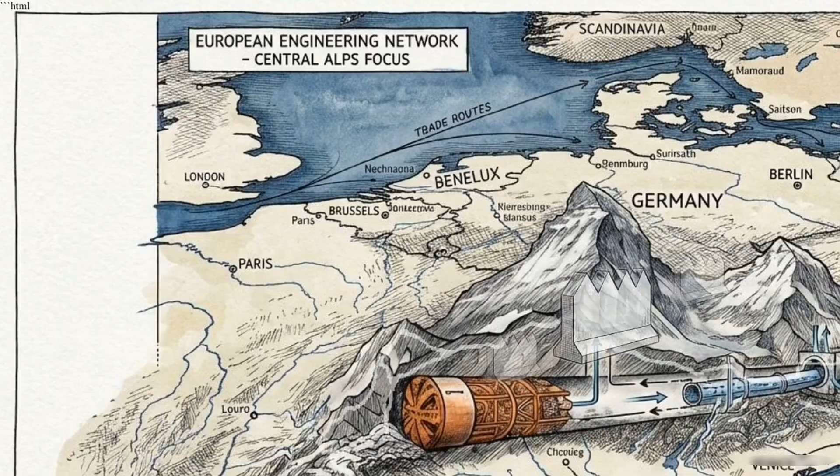The Swiss Alps stand as a massive, jagged wall of rock and ice. For centuries, this physical barrier divided the factories of northern Europe from the seaports of the south, forcing all trade over steep, dangerous mountain passes.

By the 1990s, these narrow routes reached their absolute physical limits. Heavy truck traffic created massive logistical bottlenecks, while the exhaust fumes began to suffocate the pristine mountain valleys. Finding a faster route was a matter of economic survival. If freight couldn't move through the mountains efficiently, the entire European supply chain faced a total collapse.

The engineers proposed a radical bypass, driving a hole straight through the mountain's base. At 57 kilometers long and 2.5 kilometers deep, it would become the deepest and longest transport tunnel in human history. To finish the project on time, two separate engineering teams had to drill blindly toward each other from opposite sides of the range. Because of the vast distance, they mathematically accounted for the physical curvature of the Earth.

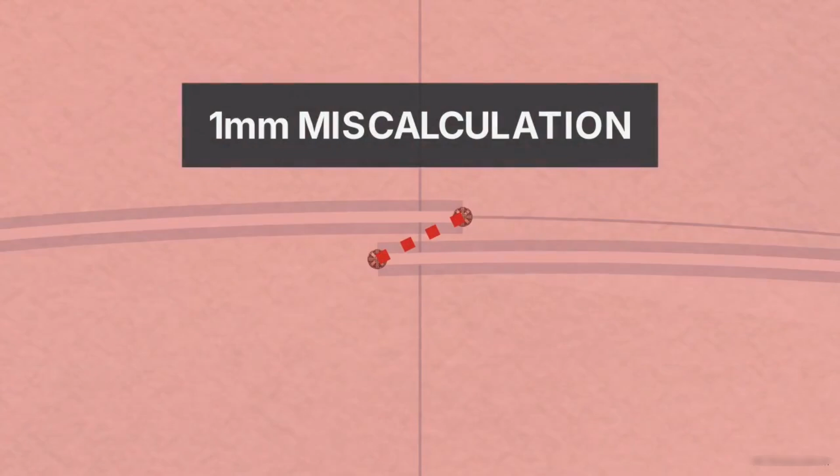The stakes were absolute. A single millimeter miscalculation would cause the tunnels to miss each other, wasting 17 years and billions of dollars. Achieving that level of precision meant winning a high-stakes war against the unconquered geological forces hidden deep inside the Earth's crust.

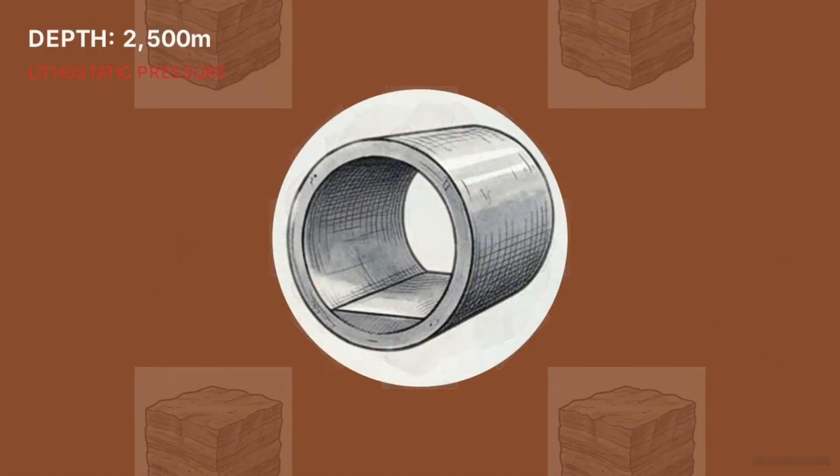This is Sissi, a 450-meter-long tunnel boring machine designed to chew through 30 million tons of solid alpine rock. Underneath 2.5 kilometers of mountain, the sheer weight of the rock crushed heavy steel supports like aluminum cans. Crews immediately sprayed rapid-set concrete and installed precast slabs and heavy steel rings to hold back the earth. Advancing every single meter required an immediate, simultaneous effort to support the weight of the entire mountain to avoid being buried alive.

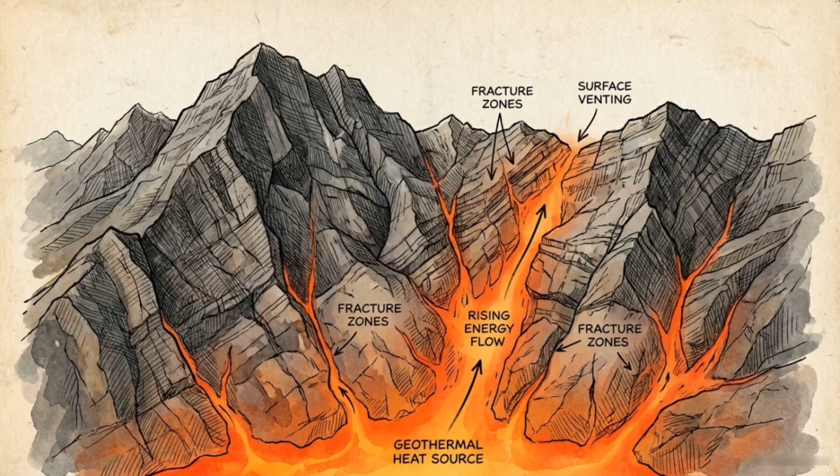At 2 kilometers down, rock traps ancient geothermal energy. As the boring machines move deeper, the temperature inside the tunnel spiked to 50 degrees Celsius, well over 120 degrees Fahrenheit. This heat threatened to melt down heavy machinery and put human workers at risk of fatal heat stroke within 15 minutes of beginning a shift.

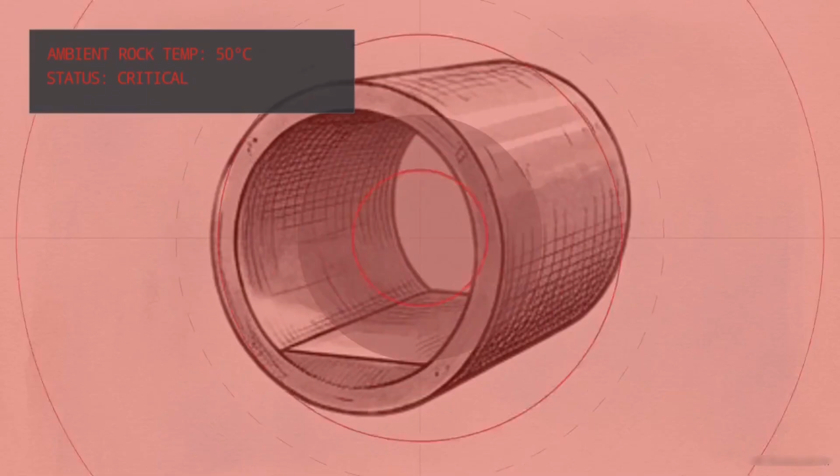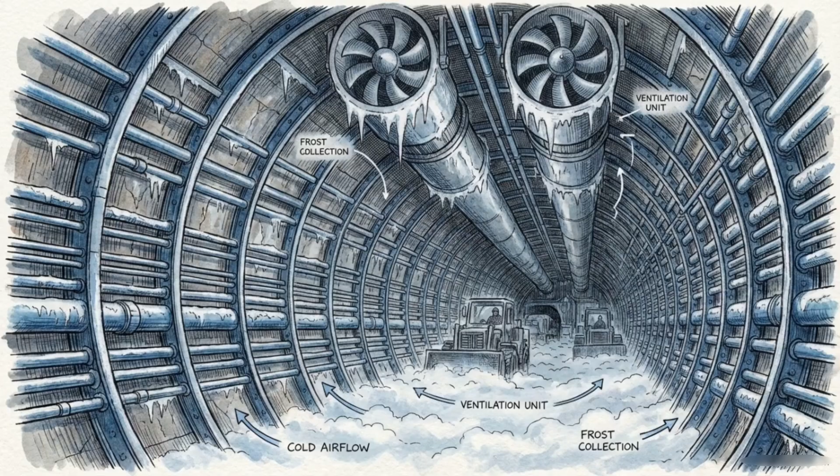Engineers installed a massive cooling infrastructure to make the environment habitable. They ran kilometers of piping along the walls, pumping in freezing water to drop the internal temperature and keep the air breathable. The project site functioned as a high-tech life support system, where human survival depended entirely on the constant circulation of chilled air.

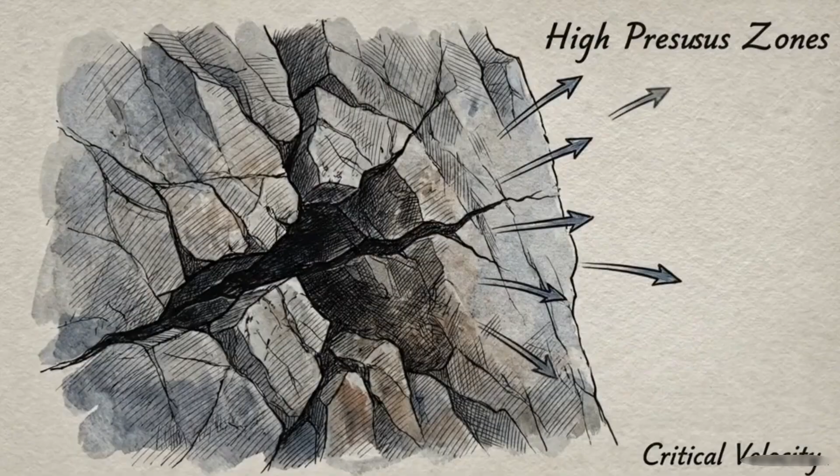Hidden inside the rock, fractures held millions of gallons of water trapped under 2,900 psi of pressure. Breaking into these pockets blindly would release a jet of water with the explosive force of a cannonball, capable of tearing through concrete and steel.

To secure the path, engineers drilled small pipes ahead of the main machine and pumped in liquid nitrogen. They literally froze the subterranean water solid, turning the flood risk into manageable ice. By freezing the ground before carving it, the teams physically transformed the mountain's internal state to ensure they survived the journey.

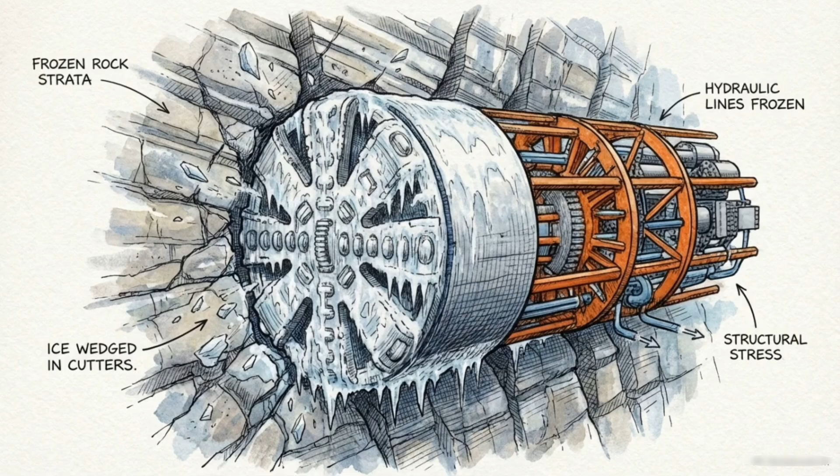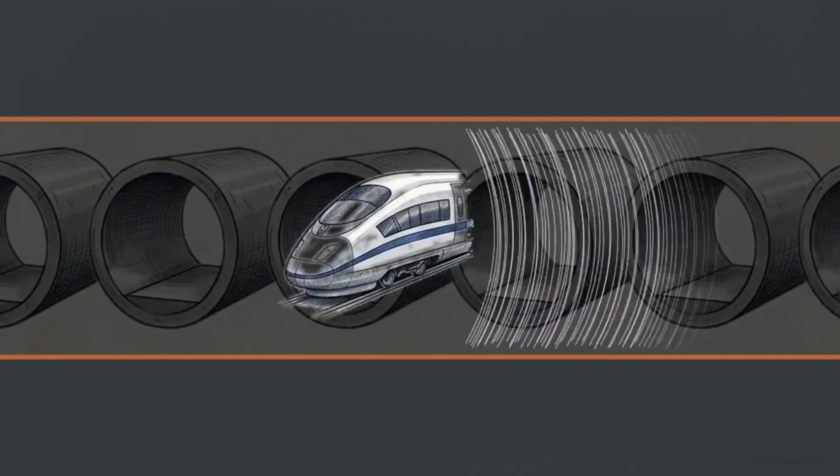Even with the rock cleared, the tunnel faced a final aerodynamic challenge. A high-speed train moving through a 57-kilometer tube acts like a piston, compressing a massive wall of air in front of it. Without a way to vent this air, the resulting pressure would generate a shockwave capable of shattering the passenger train's windows.

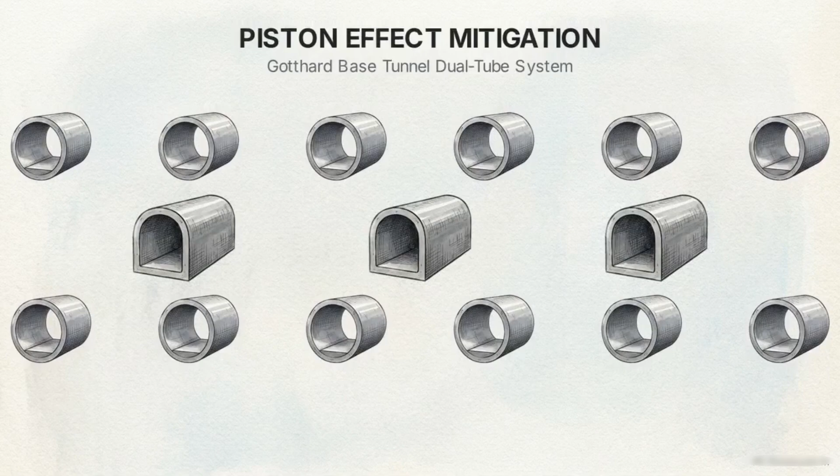The solution required 2 parallel tunnels connected by cross passages and ventilation shafts. This design allows the air pressure to bleed off safely as the train passes. Completing the project meant engineering not just for solid rock and pressurized water, but for the violent physics of compressed air.

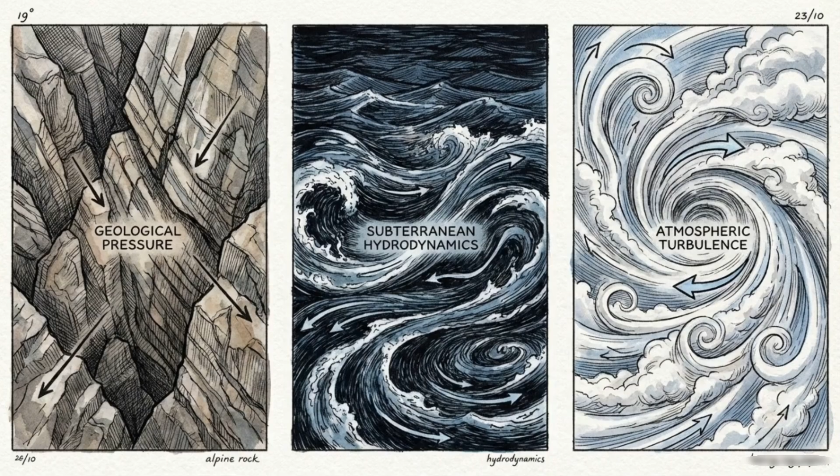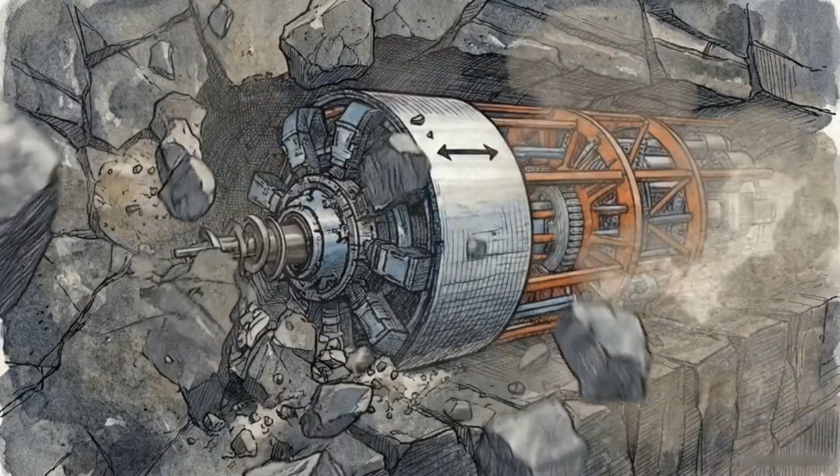October 15, 2010. After 17 years and $12.5 billion, the drill teams were finally closing the final gap between the two separate tunnels. Using advanced GPS and laser navigation, the teams successfully met in the center of the mountain. The total deviation across the 57-kilometer distance was only half an inch.

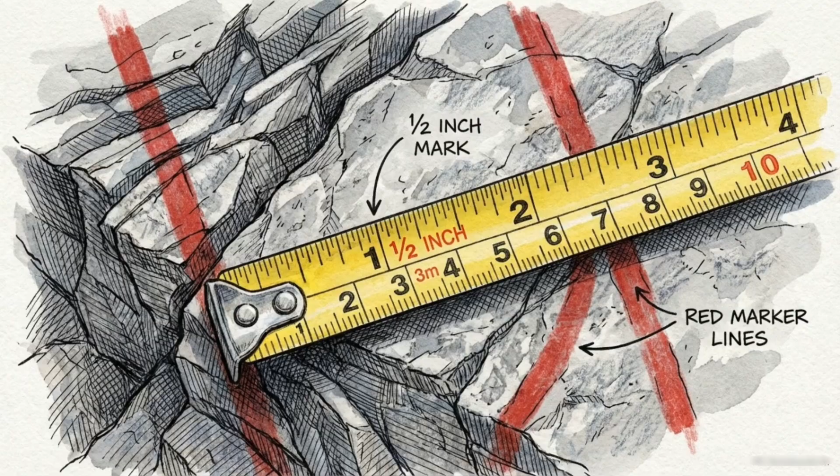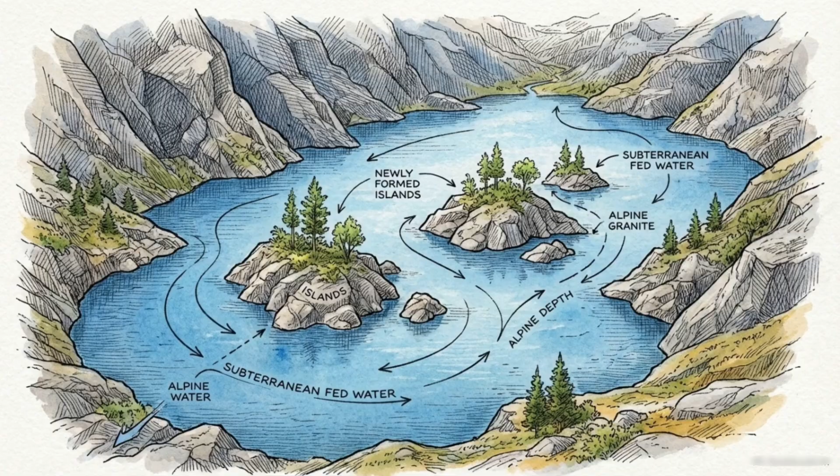The sheer scale of the work left a permanent mark on the landscape. 30 million tons of excavated rock were repurposed into artificial islands in Lake Lucerne, and a memorial at the tunnel entrance now honors the 9 workers who died during construction.

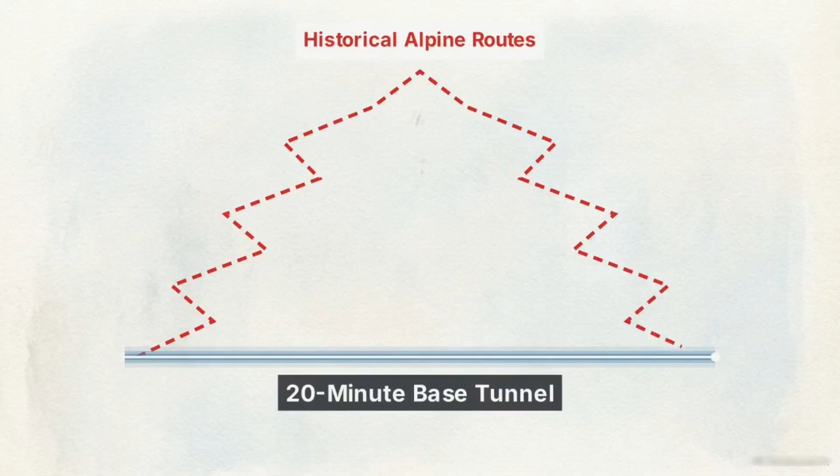The tunnel physically realigned the continent. High-speed rail now glides through the Earth's crust, replacing the slow, high-altitude climb with a crossing that takes only 20 minutes. The Gotthard Base Tunnel proves that when humanity faces an immovable geological wall, we don't have to go over it. We just invent the tools to go right through it.